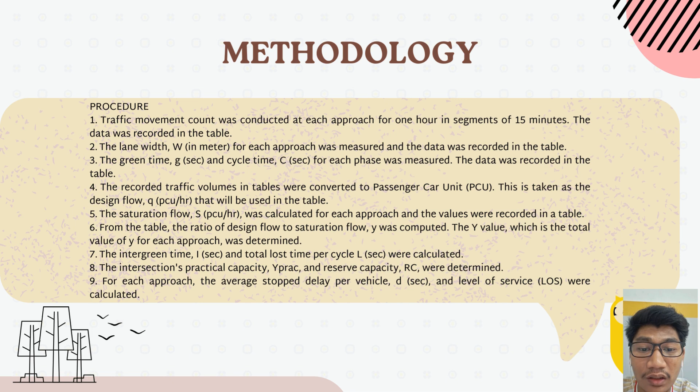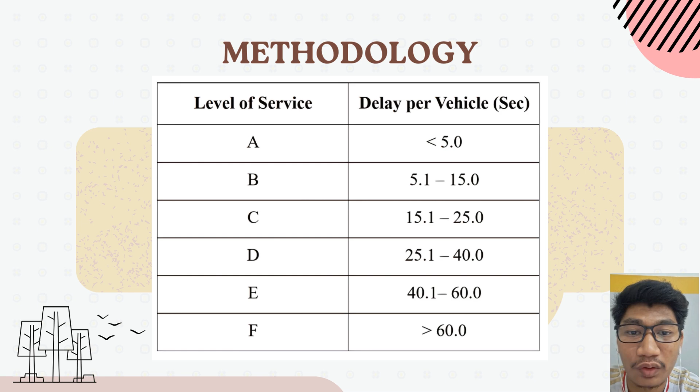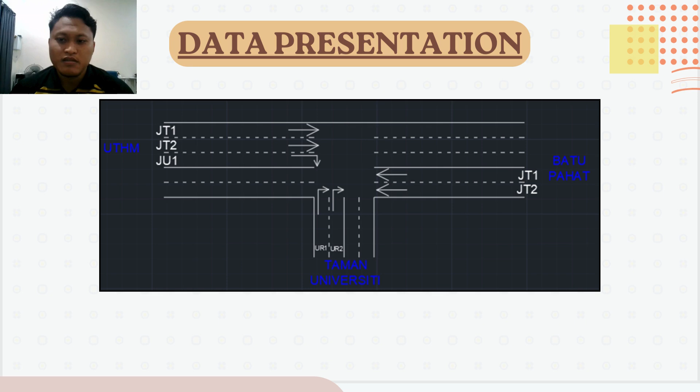Assalamualaikum warahmatullahi wabarakatuh. My name is Muhammad Akmal bin Muhammad Muslihan. I will continue this presentation with chapter 3, the data presentation. Our group was assigned to evaluate the traffic signals at the Taman Universiti intersection. This is the intersection layout, a three-way junction at Taman Universiti.

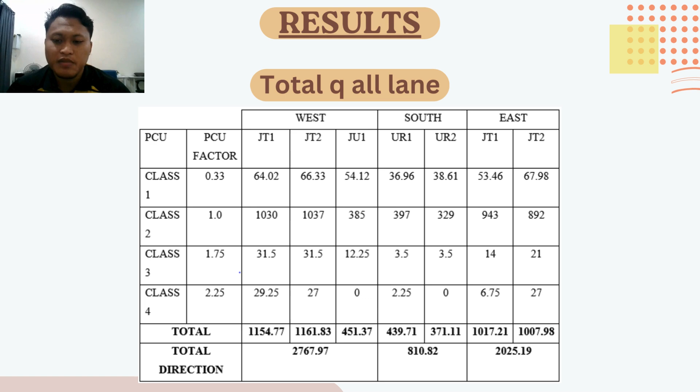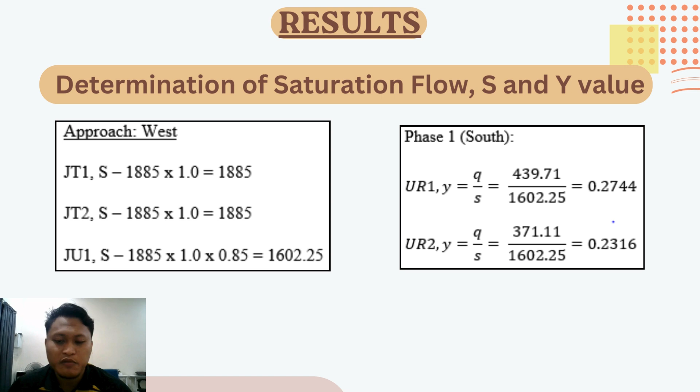Firstly, we calculate the Q value for all lanes, which is the number of vehicles multiplied by the PCU factor. Secondly, we determine the saturation flow S and Y value. Here is an example calculation to find the value of S and Y. This is the Y value for all phases. After that, we determine the average delay D for each phase.

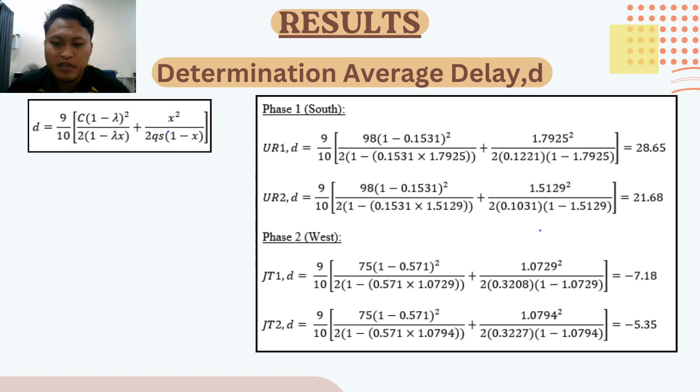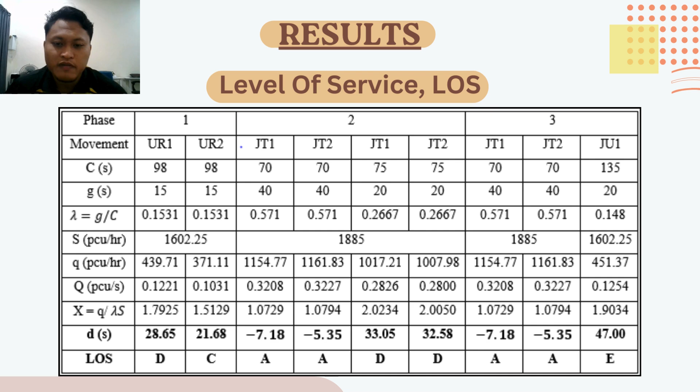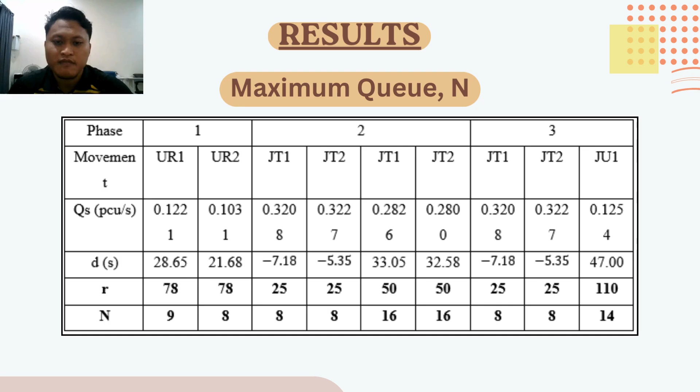Hi, my name is Aina Damia Mesara binti Muhammad Noor. I'm going to talk about the discussion. There were four categories of vehicles: cars, vans and medium trucks, buses and heavy trucks, and motorcycles. There were variations in the level of service for every phase and lane. For instance, in phase 1, the LOS for the left and right lanes were D and C, while in phase 2, the LOS for the left and right lanes were A and D, and in phase 3, the LOS for both lanes were A and E.

Several factors, including the weather, the location of data collection, the equipment, and the unit being investigated, might have had an impact on the inquiry. For instance, gathering data on a rainy day may obstruct the observer's perspective and produce incorrect data. To provide a good view and prevent mistakes, the placement of data collection also needs to be carefully considered.

We can conclude that the intersection's posted speed limitations were appropriate because they reduced reaction time and helped regulate speed. Nevertheless, several suggestions have been made to enhance the intersection's traffic flow, such as the use of artificial intelligence traffic lights, which may reduce the amount of time vehicles have to wait at intersections because they have access to real-time traffic data. Optimizing the signal cycle time is another recommendation for minimizing intersection traffic congestion.